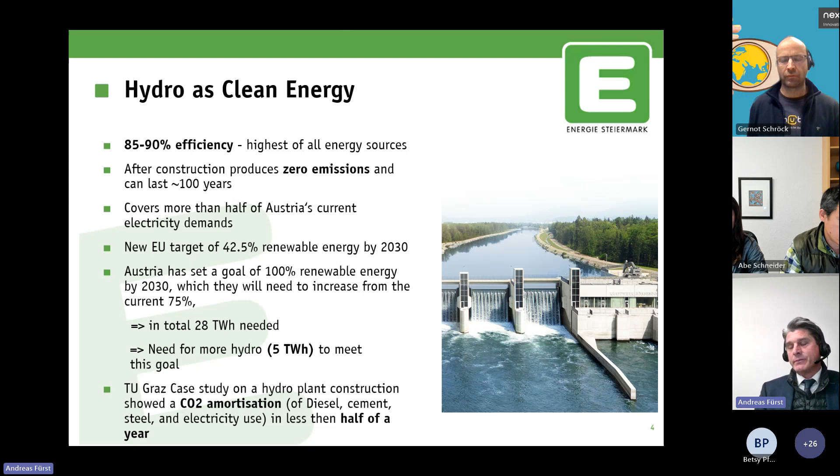Another big argument for me is a Technical University Graz case study on hydro plant construction, which showed a carbon dioxide amortization in less than half a year. That is comparable to wind energy.

We have big challenges planning hydropower plants. On one hand, we have to install green energy. On the other hand, there's nature conservation, and we have to avoid splitting ecosystems and fish habitats, and avoid negative effects on water quality.

That's also a reason why non-governmental organizations have mixed opinions about the efficiency of hydropower plants. The prospective basis of the approval procedure in the future is the nature restoration law, where we have to remove barriers from about 25,000 kilometers of free-flowing rivers by 2030. That means we need more comprehensive solutions and appropriate locations.

This could be existing water management structures, like in the case of the KW Großsulz.

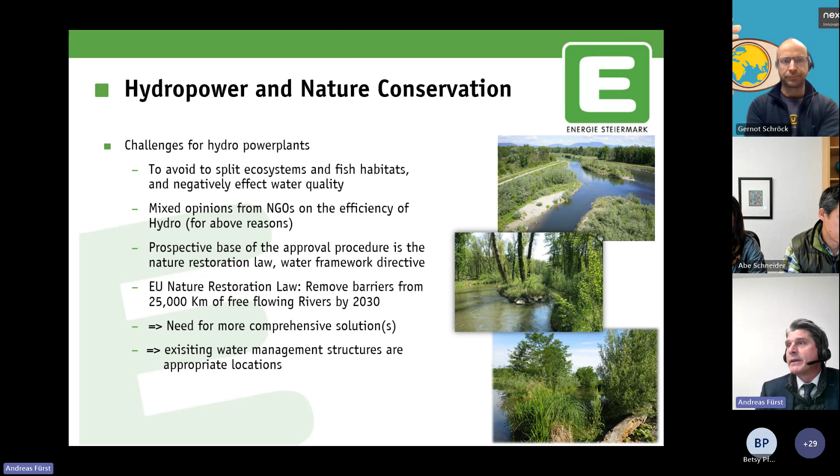What does a project like a hydropower plant mean? We at Energie Steiermark ensure that we carry out a lot of ecological measures, and we have very stringent ecological monitoring before, during, and after construction. This includes instruction by ecological supervision during the construction period, and the result is that we improve the actual situation, as you can see in the pictures beside.

Before we start with a project, we have to do a lot of measures like fish drying, and we have to save plant roots and observe the fauna and flora around the construction site.

Larger projects are audited by an environmental impact assessment, which includes all the nature laws of Austria, Styria, and the guidelines from the European Union. We have very great experts here in green power who can do their best to get approval in an ecological way.

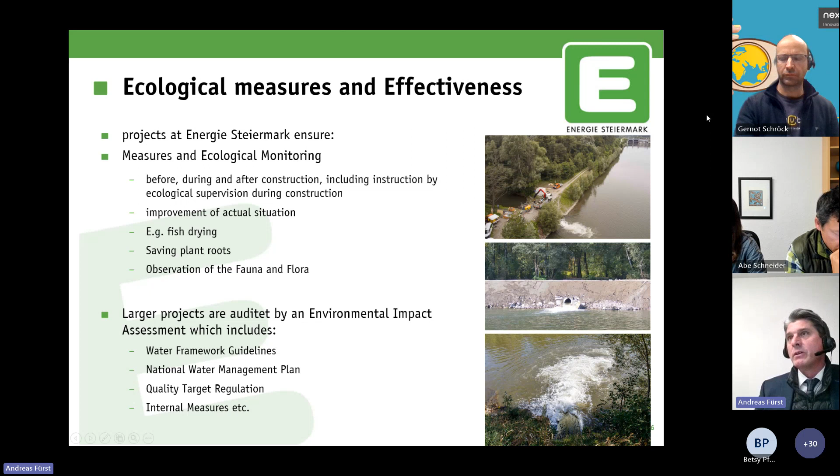What should we protect? I will give you an overview of the most deserving protection species along the River Mur, which are larger than 20 centimeters. These are brown trout, the Danube salmon, the grayling, the brook lamprey, the barbel, and the burbot.

Why do I mention larger than 20 centimeters? Because if we would like to protect all the fish species, we need larger diameters. This project, which is the first of its kind in Europe, is a little bit too small to guarantee fish passing for species larger than 20 centimeters.

But we are working on it so that, for instance, at River Mur projects like Karlsdorf, Gössendorf, or Graz, we can also protect larger fish species.

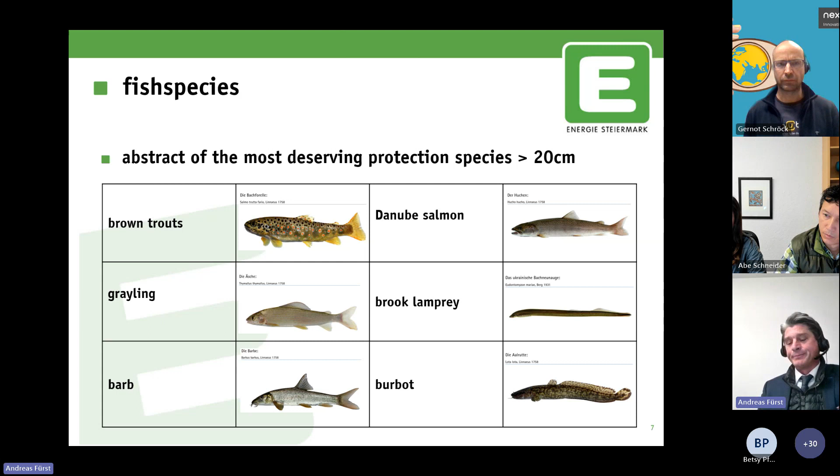One of the most important criteria for us in selecting a turbine system is the efficiency. The fish-friendly turbine from Natel allows fish to swim downstream through the turbine and has a maximum operating efficiency of about 90 to 93%. This is comparable to a traditional Kaplan turbine, which normally has 90 to 95% efficiency.

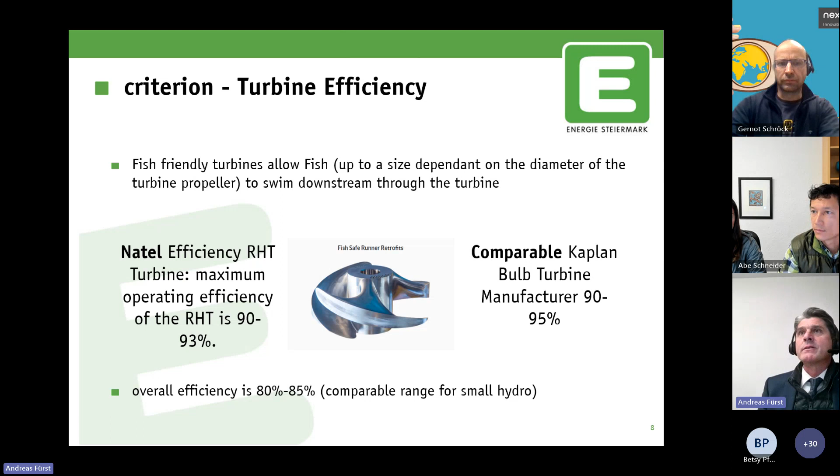The overall efficiency, which was a little surprise for us, is also about 80 to 85%, which is in the comparable range for small hydropower plants. What do we expect with this technology? We would like to reduce the head loss from the trash rack.

If it's possible to increase the grate spacing by using a Natel fish-friendly turbine, we can increase the grate spacing to 8 centimeters. At the moment, we are discussing a grate spacing of about 2 centimeters, and you can increase the efficiency from 97.5 to 99.6%. That means in just a small project like KW Großsulz, we can reduce or avoid the loss of about 0.4 kilowatt for a whole year. In result, we can reduce the loss of about 3,500 kilowatt hours.

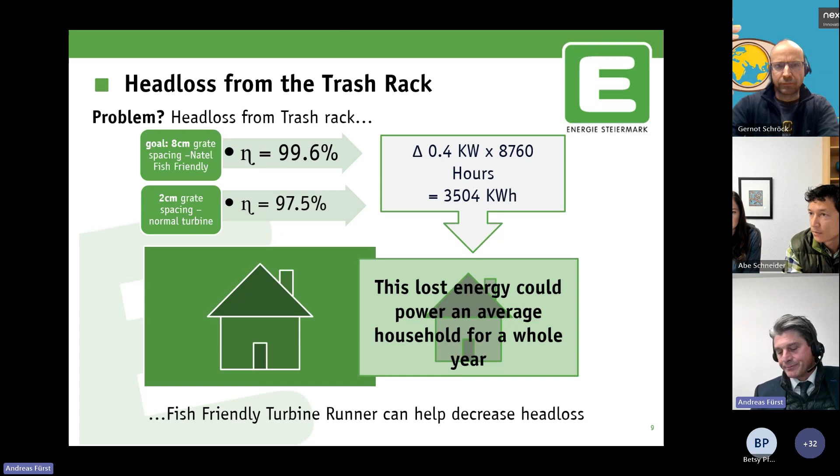And this lost energy could power an average household in Austria for a whole year. We expect that fish-friendly turbine runners can help us decrease that loss. Our solution is our project Großsulz.

The motivation for this project was to find a fish-safe, efficient, low-head turbine that allows fish and small debris thoroughfare, with a simple structural design and a short installation period. We tried to plan a concept like plug and play. Another advantage is that the upstream flow is left untouched, restoring the passability of fish species.

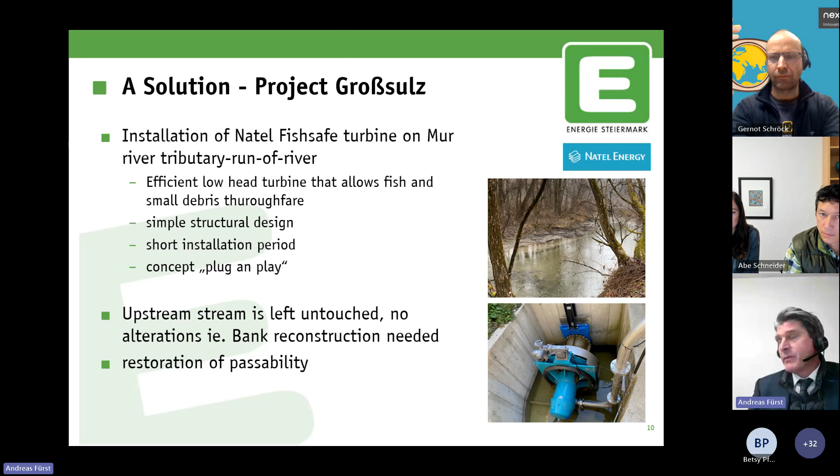We just had to construct a small shaft, a trough tube through an existing dam construction in the tailwater area of Karlsdorf, and we didn't need any temporary construction pit systems in the river system. So we can spare a lot of money.

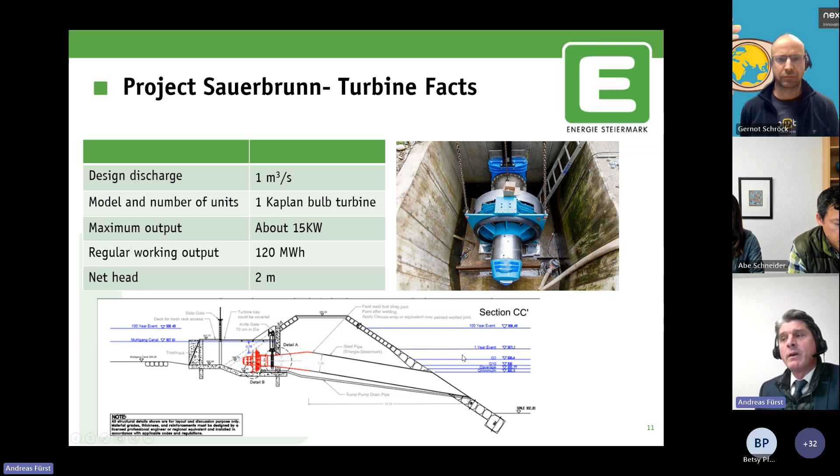In the following plan, you can see the location of the power plant, the small shaft. Here we have installed the restoration hydro turbine. We just need a control hut and the turbine cabinet.

So we don't have a lot of civil works. We have a construction period of about 7 weeks for the civil works, and about 2 months for the whole installation of the turbine. In my opinion, it fulfills the criterion of a plug and play project.

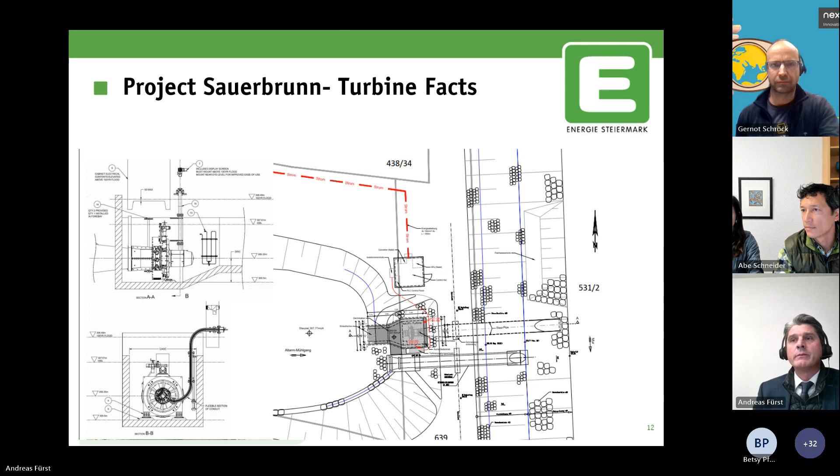The project status: last year in autumn we installed the turbine. The operation shows us good efficiency, and we plan fish tests in spring 2024 together with the University of Bodenkultur, Vienna, which has big expertise in protecting fish species. So we expect to get good results from these fish tests.

Our ecological review program has started this summer, and we are also planning an installation of a fish monitoring underwater camera in spring 2024, which is the basis for implementing an artificial intelligence monitoring system.

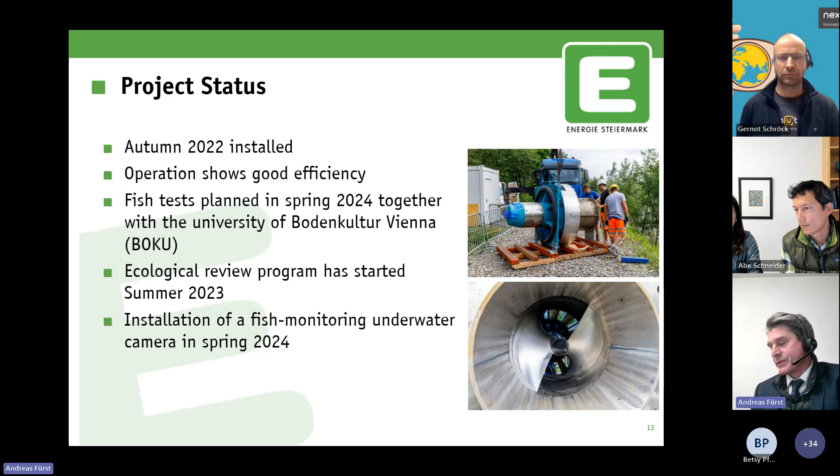What are the next steps? At the moment we have further approval by local authorities in Styria for another project called Ochsengriesbach, which is a Mur spillway flowing beside the Mur. It's a little bit larger, and it's the first project where Natel cooperates with a local manufacturer in Austria. At the moment, Energie Steiermark is negotiating the price with the Austrian manufacturer. The big hope is to work together on a larger scale project, because then we have better results in efficiency.

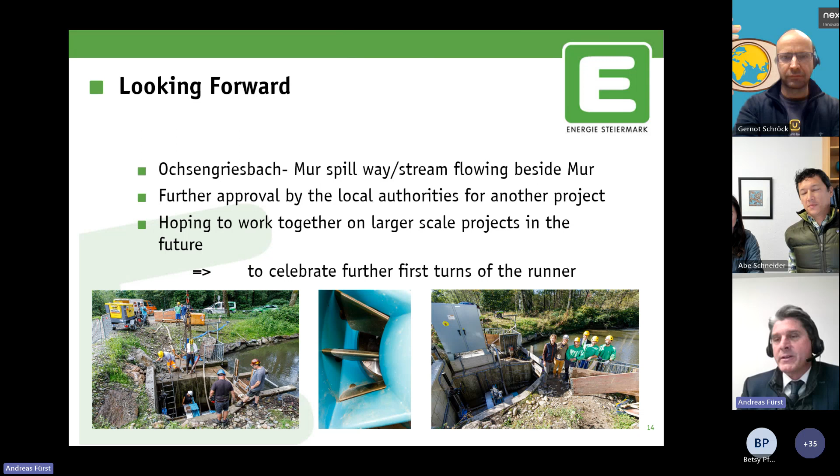And we would like to celebrate further first turns of the runner, like you see in the picture underneath. It's like a lottery at the site, where we try to find out whether the runner is working as we have expected. With these impressions, I thank you very much for your attention, and I wish you lots of energy. Thank you very much.

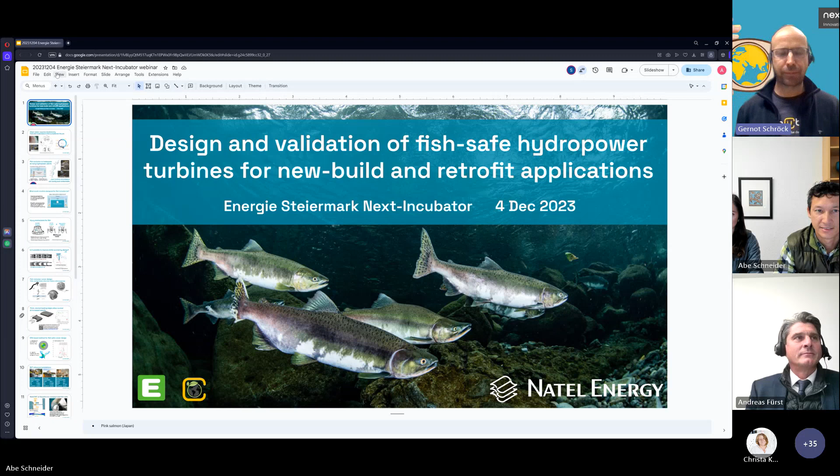Thank you very much, I will pull up the presentation. Okay, can you see it okay? We can see it, yeah? Maybe you can go to the presentation mode. Yes, perfect, okay, thank you very much.

My name is Abe Schneider. I am co-founder and CTO at Natel Energy. I'm Sterling Watson, I'm a staff mechanical engineer, and I focus on turbine design for fish safety.

We would like to thank Energie Steiermark for this opportunity to collaborate on this important milestone, which is the first European installation of a fish-safe turbine of this novel design. We would like to follow up Andreas' excellent overview of the situation with a presentation that dives more into the details of the design and validation of this turbine. But first, I wanted to make a couple of comments about the context in which we're working.

Why does biodiversity matter? There are several ways to answer this. One is philosophical: living organisms have inherent value, and it's our responsibility to minimize damage to ecosystems as we fulfill our own development needs.

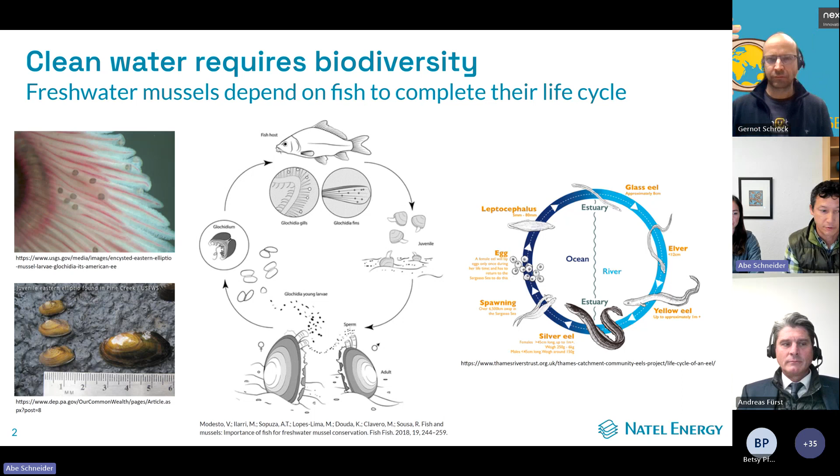Another answer is more specific, illustrated by the intertwined life cycles of fish and freshwater mussels. Freshwater mussels are filter feeders that provide clean water simply by carrying out their lives, but mussels need fish hosts to complete their life cycle. By providing safe passage of fish through hydropower turbines, we can encourage the successful life cycle of other organisms, including mussels, which elevates the health of the entire river ecosystem.

Taking a closer look at the current situation with hydropower and fish passage: conventional hydropower turbines are not safe for fish, and they can get injured in a variety of ways. This means the only way to protect fish when turbines are dangerous is to keep them out entirely. This can be done with fine screens designed to redirect fish around a plant, but this is difficult because at most hydropower facilities, the majority of water passes through the turbines, and fish instinctively follow the majority of the flow. So achieving successful fish exclusion that facilitates fish passage is really difficult.

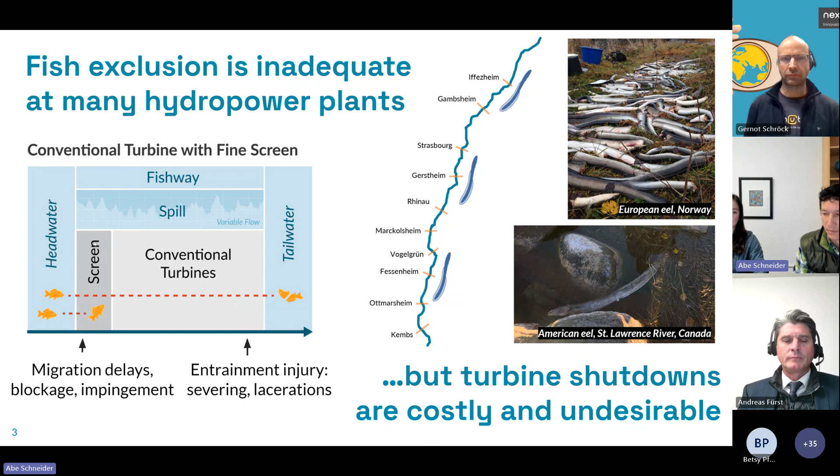Another approach taken in some cases is to shut down turbines during fish migration seasons, which is of course undesirable for hydropower production. So we want people to start thinking about what becomes possible when fish are included in the design of turbines - what becomes possible when turbines are truly fish safe?

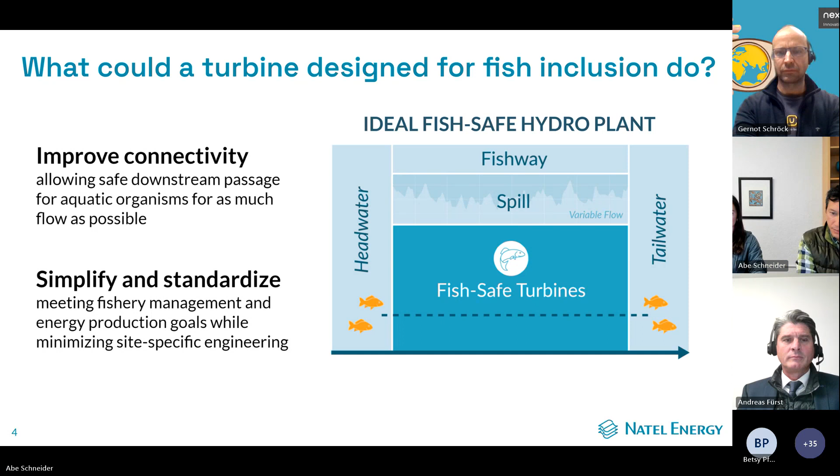This is a look at how an ideal hydropower plant might function when its turbines are safe for fish. You can see that all, or the vast majority, of the downstream passing flow becomes available for fish to use to move downstream. This also simplifies both the design and operation of the hydropower plant, because fish safety is integral to how the turbines work. Let's take a closer look at how fish are often hurt as they pass through conventional turbines, or through any turbine.

Especially at low head, the most important sources of fish mortality or trauma tend to be mechanical in nature. That's direct blade strike, where fish are struck by the leading edge of the moving runner, or blade strike in combination with mechanical grinding - when fish are trapped between moving and stationary components, or in the case of a Kaplan turbine, where there may be gaps between the blades at the hub and tip, where fish can get stuck and hurt.

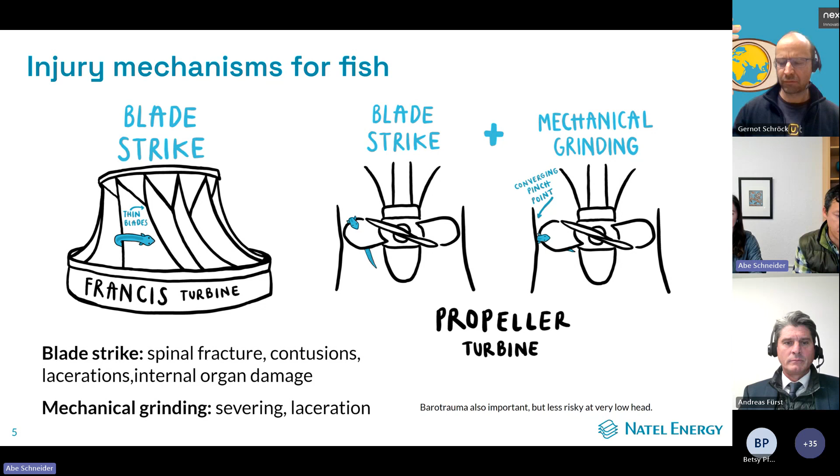Barotrauma is also an important risk - this is trauma related to sudden changes in pressure as fish go from the upper pool through the turbine, with a sudden drop in pressure, then exit into the lower pool. But at plants like Sauerbrunn and Großholz, this is a relatively low risk compared to risks from direct mechanical injury.

One of our most important goals has been to allow for fish safety at elevated speeds. This is important because to have a truly scalable impact and a solution that works for as much of the hydropower industry as possible, we need to find ways to allow turbines that operate at conventionally high speeds to be safe for fish, not just turbines that are really slow.

In this work, we're building upon research done by others for more than a decade. Here I'm sharing photographs taken from high-speed video of fish struck in a laboratory in the United States at Alden Research Laboratory. Alden was one of the first groups to quantify the dependence of fish survival from a blade strike on a ratio called the length-to-thickness ratio, or L to T ratio - the ratio between the fish's body length and the thickness of the turbine blade leading edge.

And what Alden showed quantitatively is that at high L to T ratios, so when the fish is large compared to the thickness of the blade hitting it, fish are more susceptible to be hurt at the same speeds where a thicker blade would allow for survival.

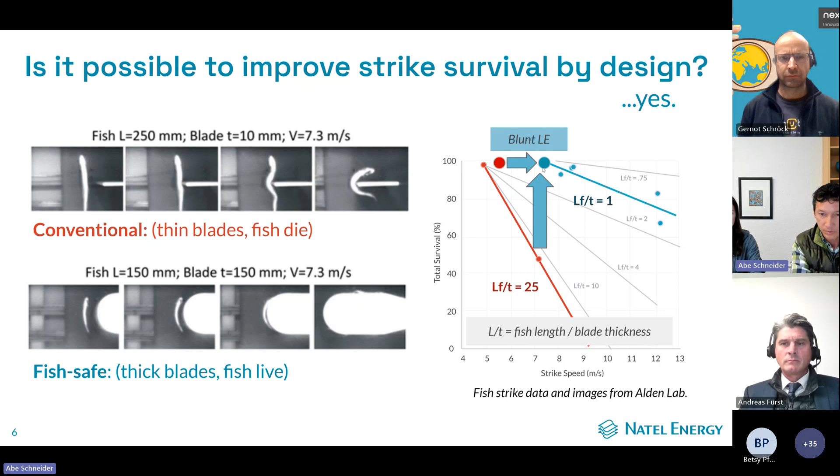So to solve that problem, Natel has focused on ways to allow for very fast-moving hydropower turbine runners to also be safe for fish. The thing we've added to this field is this combination of very blunt leading edges with very forward slanted leading edges. The reason for this slant is that the slant angle allows for arbitrary control over the forces that actually result in trauma to the fish.

Our hypothesis is that these forces are proportional to the orthogonal component of the free stream relative velocity. That is illustrated in these cartoons on the lower left of the slide, where the water relative velocity approaching the turbine blade is in blue, and the effective orthogonal component of that velocity at the point of collision on the blade surface is illustrated in red.

If we can simply change the slope of the leading edge, then in theory this red vector will shrink in direct proportion to that angle. And if we were able to slope the angle all the way so that it was parallel to the water flow, then this force would disappear entirely. But also you would have no blade, and so you would have no turbine.

So like most engineering problems, this is a situation where we need to find a way to balance the desired benefit with the cost of implementing that benefit. It turns out that a slant angle of about 30 degrees allows for a 50% reduction in the effective strike velocities, while still resulting in a mechanical blade shape that could still be manufactured and withstand the stresses of its operation.

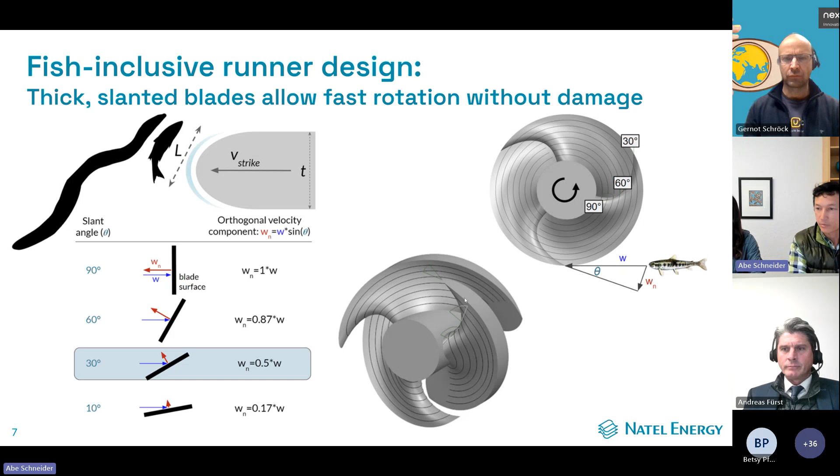So we tested this hypothesis in laboratory experiments in 2019 and published in a peer-reviewed article in 2020. Returning to the Alden Research Laboratory, we worked with Alden and with United States fish regulatory agencies to define and then carry out a test to determine if this hypothesis of slant combined with thickness could result in significant improvements in safe strike speed. In the background here is a representation of the original Alden blade used in their studies 10 years ago, and in the foreground is shown our new curved, slanted and blunt blade to test our hypothesis.

On the right-hand side, this chart depicts strike survival on the y-axis from 0% to 100%, and on the x-axis is the blade leading edge slant angle. What I've circled is the survival when the fish is struck at 90 degrees at 10 meters per second, which is only about 30% survival. But if we decrease the slant angle to 30 degrees at the same strike speed, almost all of the fish survive. This was a fantastic validation of this hypothesis.

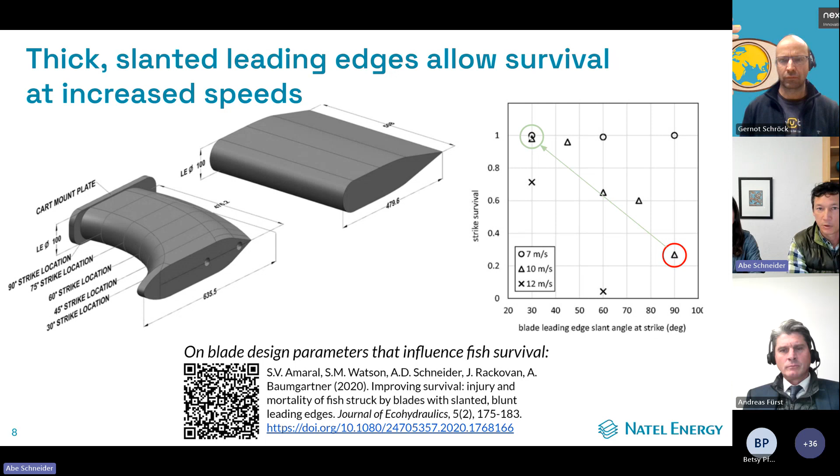In the course of this test, we struck almost 2,000 rainbow trout, and we were able to capture high-speed video of every single strike, which allowed us to replicate those strikes in CFD and create a calibrated computational method, a deterministic method of calculating the absolute survival of arbitrary geometries of fish passing through turbines with arbitrary geometries. This is truly the heart of our ability to create new runner shapes for new power plant applications.

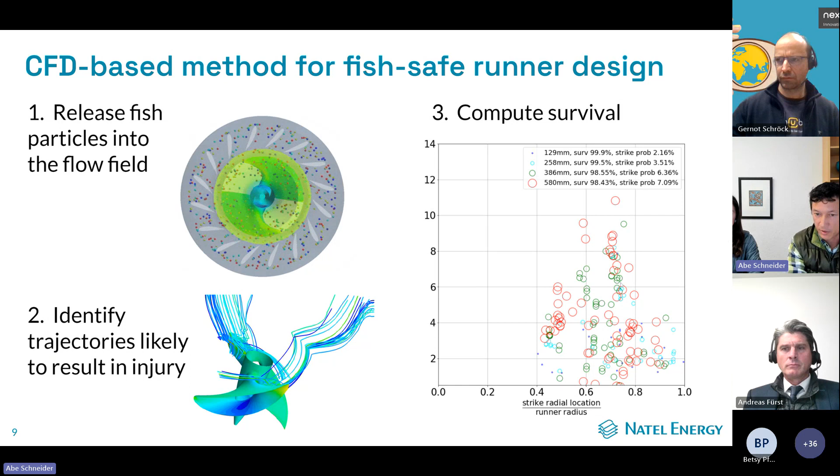We are able to release digital fish particles into the flow to track their movement through space in 3 dimensions, post-process their dynamics, and then compare that against our calibrated laboratory strike data to produce a computation of expected survival. This is something we continually validate, verify, and tune as we go forward.

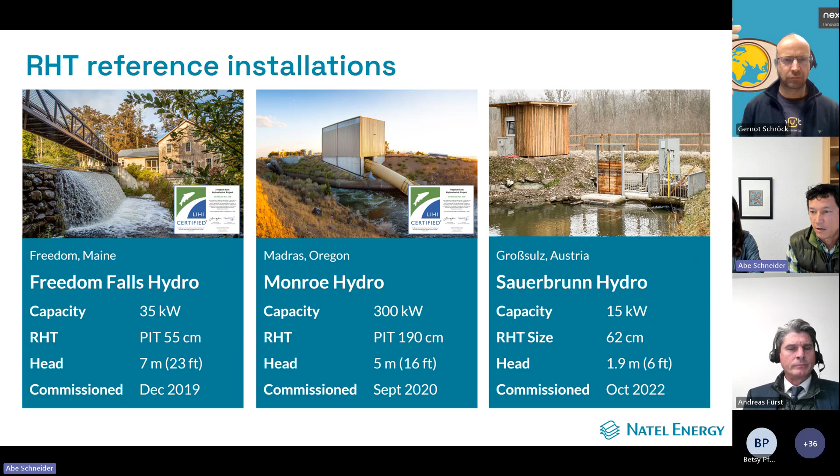At this point in time, there are 3 different turbines in the world that use runners following this design method. 2 of these are in the United States, and excitingly, 1 is now in Europe, in Austria.

Andreas has already shared quite a bit about the development of the project at Sauerbrunn in Austria, but I wanted to share a couple of additional points. On the left is an overview of the plan view of the site. You can see that the turbine takes water from a small tributary which drains into the River Mur. One of the goals of this project was to really reduce as much as possible the civil works and the complexity of project execution.

One aspect was keeping the turbine module effectively as high as possible to reduce excavation and civil works cost. This, of course, imposed risks on the operation of the turbine, such as whether the turbine could flush all of the air out of the draft tube. What I'm showing in this bottom left animation is an air and water simulation we performed during development of the plant to ensure that air could be transported out of the draft tube, allowing for full filling of the draft tube and successful operation at startup with no additional complications, which is what the plant is able to do now.

On the right, we see a nice zoomed-in photograph viewed from upstream and looking down the shaft of the turbine. A couple of things I wanted to point out here: this is a 2-bladed runner with a leading edge thickness of just under 9 centimeters, and this is with a turbine diameter of only 62 centimeters. It is a variable speed permanent magnet generator turbine.

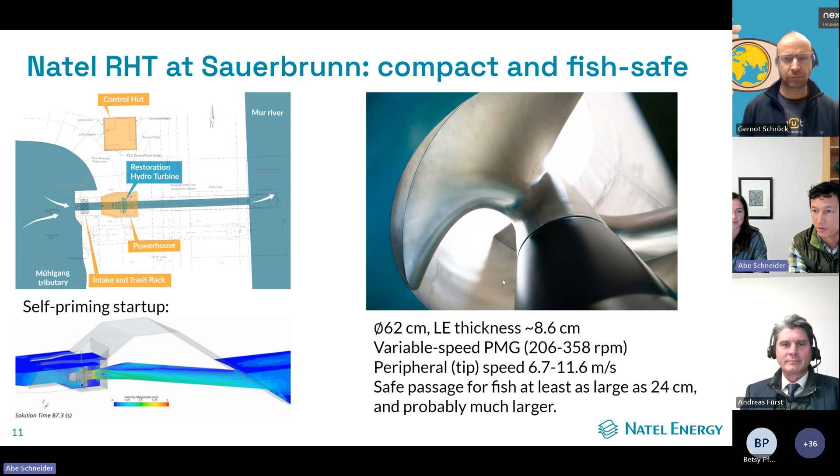If you think back to the slide Andreas shared showing a variety of fish species, 3 of those 6 were salmonids. So salmonids have been both an early and a continued focus area for us. We've conducted testing with rainbow trout, both in the field at our Monroe Hydro plant, which is 1.9 meters in diameter, as well as in our in-house test facility at small scale with a 55 centimeter diameter turbine.

Another important category of fish that we have studied and published our work on is alosines. These are a really important grouping of migratory fish on the east coast of North America, including American shad.

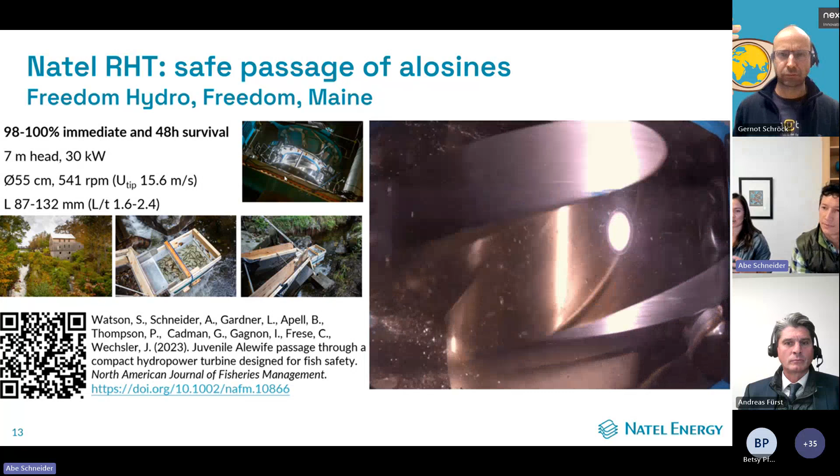But in no case are the fish actually undergoing a severe strike in which they would collide with the leading edge of the blade and move with it. This result of observed safe passage is consistent with what we saw, which was a 100% 48-hour survival rate, corrected for control mortality.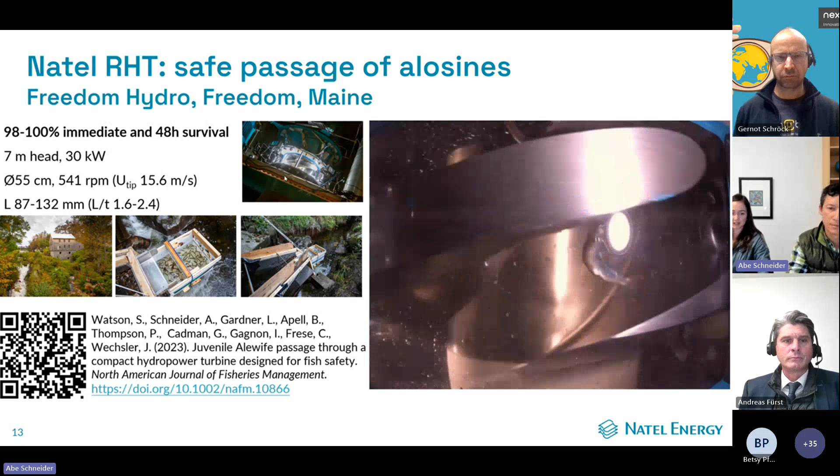And then finally, we definitely want to talk about our work with eel. Eel are a particularly difficult species when it comes to hydropower because they move downstream as large adults, and they're also extremely difficult to exclude unless you have very fine screens. So eel have been another really important focus species for us.

Our testing here in the US has been done with American eel. In 2021, we conducted a study with the Pacific Northwest National Lab at our in-house test facility here in California, where we tested a pretty extreme scenario of eel passage.

We operated this turbine at its maximum speed, which corresponded to a tip speed of 19.2 meters per second. The size of eels that we tested with was really large compared to this very small turbine — the turbine diameter is 55 centimeters, and the size of the eels ranged from 35 to 65 centimeters in length.

In the course of this study, we captured high-speed video of 89% of the eels that were passed through the turbine. We performed assessments of both the physical external state of the eel and any swimming behavior immediately before they were passed through the turbine, immediately after, and after a 48-hour hold period. We saw 100% survival over the course of the entire study.

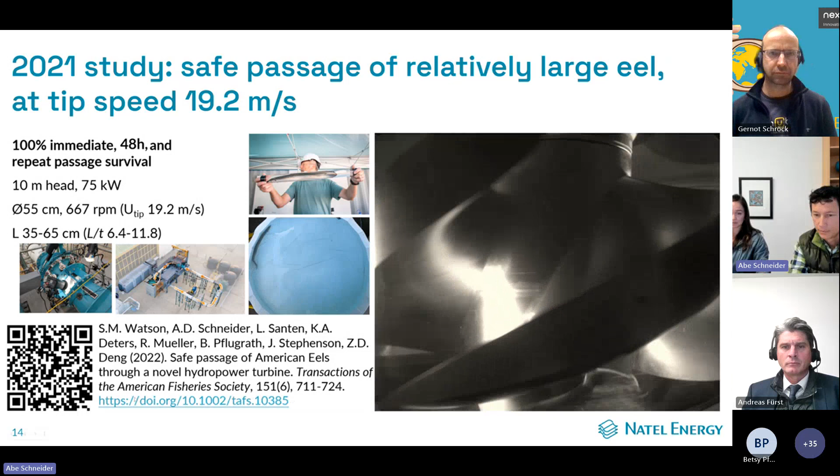There are a lot more observations that we collected, summarized in our publication that came out last year, which you can find at the link on this page. I also want to note that there are some similarities between how we'd expect eels to pass through turbines compared to lamprey, because of their very similar body shape.

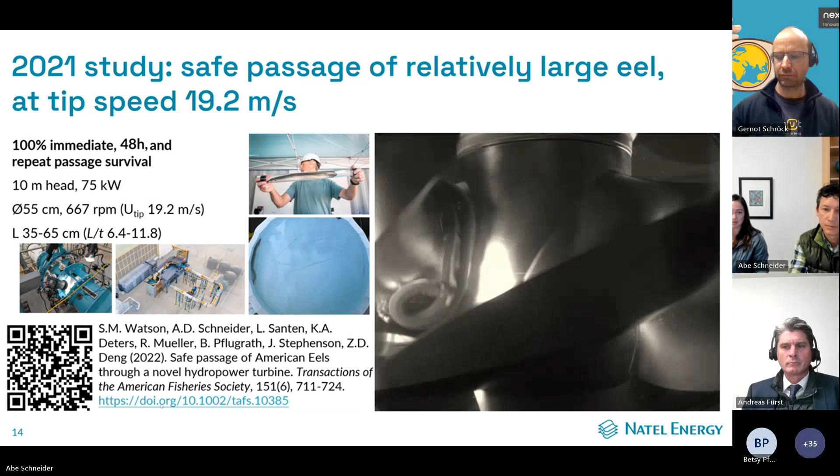This is another result we were able to get from the study we conducted in 2021 with PNNL that's not summarized in the paper. After the study concluded, we were able to do a little extra work because all the eels were individually PIT-tagged and identifiable. We took the opportunity to pass those eels through the turbine a second time.

This is really important because in many cases these eels move up into the headwaters of rivers as small juveniles, and once they mature and are ready to move back downstream, they need to pass through multiple hydropower plants separated by periods of days to weeks. So we took the eels that we tested with PNNL and passed them through the turbine a week later, and again we saw 100% survival.

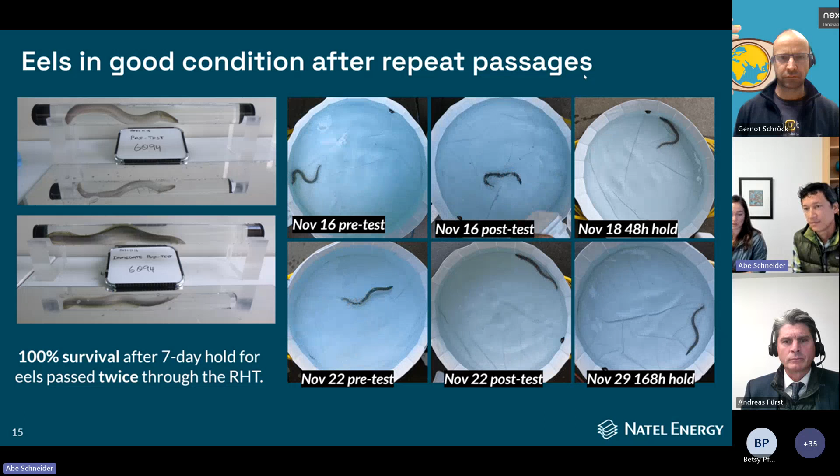That's really exciting. But how does this all fit into the context of what's out there already?

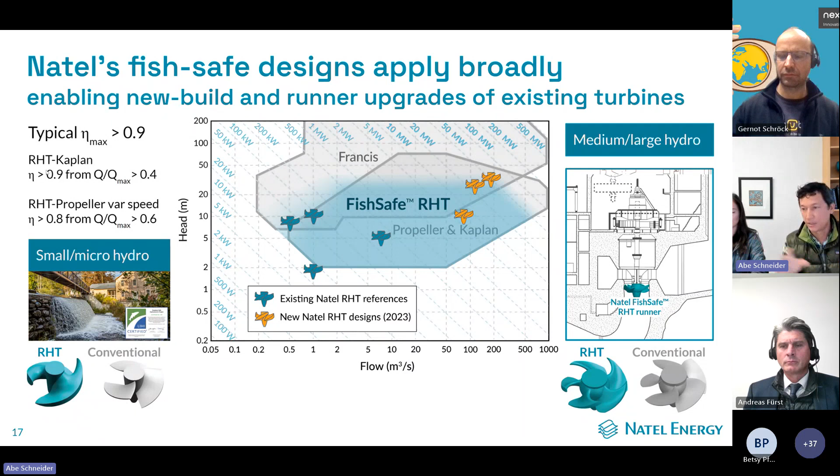And in this case, you can see the comparison between a conventional runner and the RHT runner for that type of application. This type of runner is able to maintain over 90% efficiency from flows as low as 40% of the design flow up to full flow, and can reach peak efficiencies between 92 and 93%. So truly, this is an opportunity to allow for fish-safe design without compromise, in a flexible design method that can apply to a very wide range of different hydropower plants.

So lastly, we just wanted to zoom back out and think about what is happening every day at hydropower plants on natural rivers. Organisms, including fish and non-fish organisms, are passing through hydropower plants. And it is our mission to allow hydropower plants now and into the future to operate every day in the simplest possible way while safely allowing all of these living things to pass through the plant.

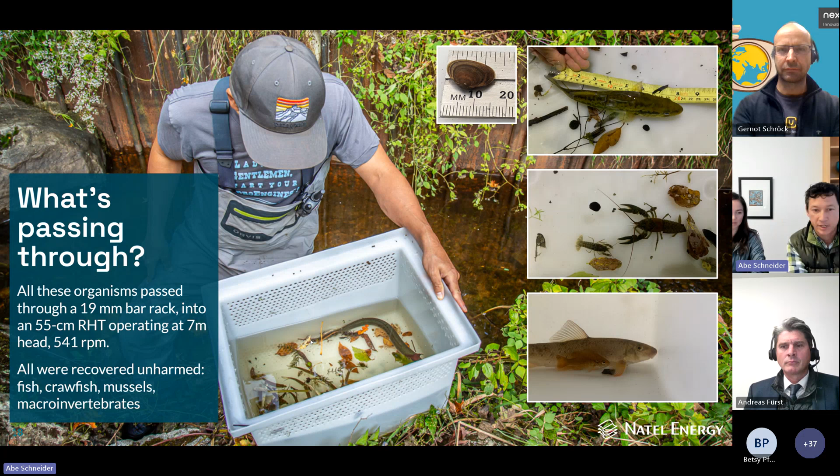This slide shows some results from our test in Maine, United States, where we were intentionally testing downstream passage of juvenile alosines, but at the same time, we were unintentionally capturing all kinds of other fish, such as this 40 centimeter eel that was not technically supposed to have made it through the trash rack or the 3/4 inch, 19 millimeter, eel exclusion screen, as well as freshwater lobsters or crawdads that all had their claws intact, 20 centimeter black bass, suckers and perch, and then also even freshwater mussels were frequently found in the live trap. We think it is quite possible for future hydropower plants to just freely pass all of these organisms every day without any additional effort required.

So finally, we'd really like to thank Energie Steiermark again for this wonderful opportunity, and Next Incubator for the opportunity to share this in this session with you guys. Thank you very much.